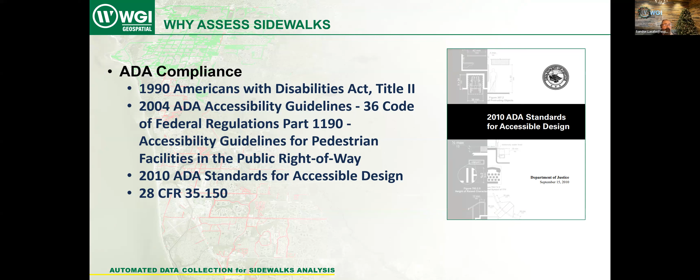So in 2014, there was a landmark case, Mark Willits versus the City of Los Angeles, resulting in a $1.4 billion class action settlement that was approved, requiring the City of Los Angeles to repair its sidewalks over the next 30 years to comply with the ADA Act. This settlement is one of the largest disability access settlements in U.S. history and was a response to the city's failure to maintain sidewalks in a condition that was accessible to individuals with disabilities. That basically equates to about $46 million per year spent in curb ramp or sidewalk improvements.

In 2019, a significant lawsuit was filed against the city of Philadelphia regarding the accessibility of its sidewalks, specifically the repair and installation of curb ramps. This lawsuit was brought forward by a group of disabled residents and advocacy groups highlighting the city's failure to comply with the Americans with Disabilities Act, requiring streets to be accessible. As a result of this lawsuit, the city agreed to a 15-year plan to install and fix at least 10,000 sidewalk curb ramps. This plan included specific milestones requiring the installation and repair of 2,000 ramps every 3 years.

The City of Philadelphia Streets Department estimated the cost of installing each ADA curb ramp was initially around $15,000, and they assumed that there would be some cost reductions as the replacement became more efficient. The estimated cost per ramp is expected to decrease to about $12,000 and then fall to $7,500. But even at that $7,500 mark, that's still $75 million liability the city has to carry over 15 years.

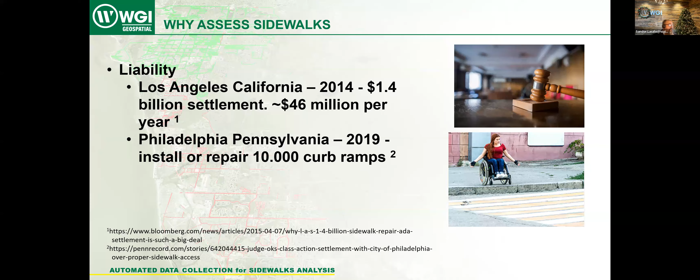Another reason to assess sidewalks is maintenance. Typically, government entities will initiate curb ramp maintenance when a citizen calls to complain about an issue. This is a reactive approach and doesn't allow the government entity to properly budget for repairs beyond looking at previous year's budget trends. With limited funding, more focus could be applied on maximizing the impact of each dollar spent to get ahead of complaints or conditions that open them up to liability.

Though complaints requiring immediate attention will always occur, strategic planning is crucial. Good planning that involves the identification of risks to prioritize repairs with a focused budget and reduced exposure to liability is worth the investment in sidewalk assessment.

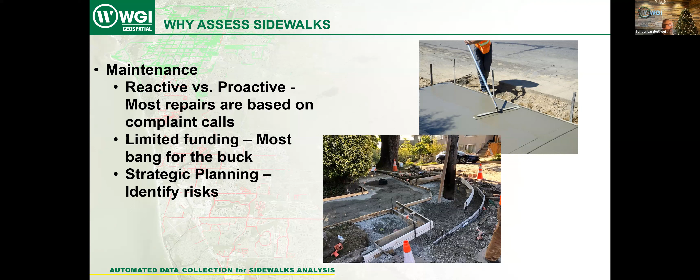This approach to sidewalk maintenance necessitates a balance between immediate response and long-term planning, ensuring safe, accessible walkways within budget constraints. What we did here: this method was developed and implemented for a Florida county where we performed a countywide sidewalk pavement and sidewalk assessment. We captured 650 miles of sidewalks using our system, then performed a condition index of the sidewalks. In addition, we captured LiDAR data to help determine some of the other ADA compliance issues. We captured imagery, and we believe the data we collected is very important for other purposes beyond the original overall condition index.

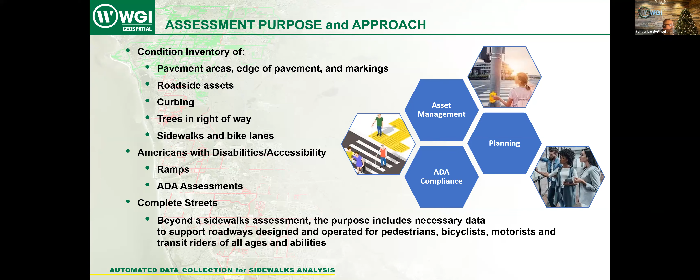We think it's going to be important for complete streets programs as well. When we envisioned this assessment approach, we saw value beyond the original purpose. Some of the opportunities to repurpose the data were very considerable. One thing we looked at was FDOT's Target Zero, a program used to reduce the amount of incidents between pedestrians and street traffic, and how the data we were collecting, combined with the additional LiDAR, can be used to help local governments assess the impact of intersections as they're laid out and how they can affect interactions between pedestrians and vehicles.

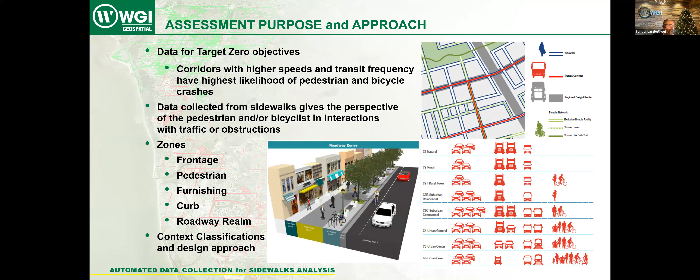So what data do we collect? Here we're just going to give a couple of examples of the types of data we're looking for in a sidewalk assessment. Some of this is related to ADA compliance, and some of this is just for condition assessment of the materials the sidewalks are created from.

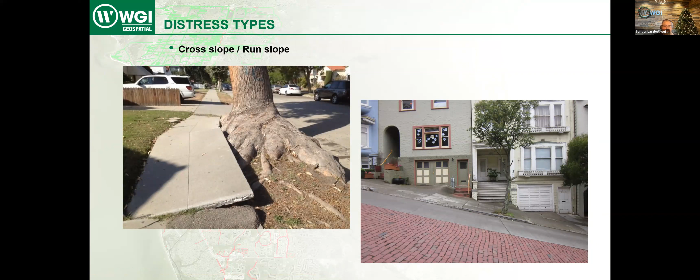Obstructions - this is obviously a very important one. If somebody with a wheelchair or mobility aid can't actually traverse around obstructions, it's an issue, which is an ADA compliance violation. So we also look for the clear walking path, to ensure that if there are any obstructions in the sidewalk, pedestrians have at least a 4 foot or greater walking width to go around them.

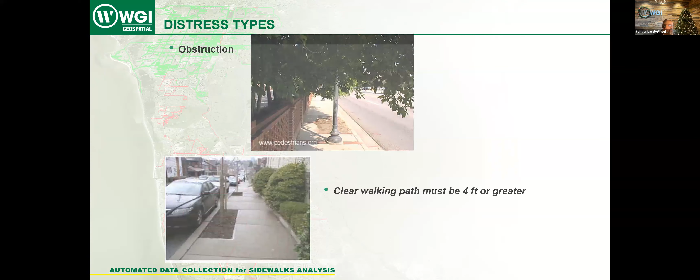Next one is overgrowth and vegetation. Similar to an obstruction, these typically require maintenance where crews would have to come out and potentially remove the vegetation. But again, if it's something that prevents the passage of somebody with a disability along that sidewalk, it requires attention.

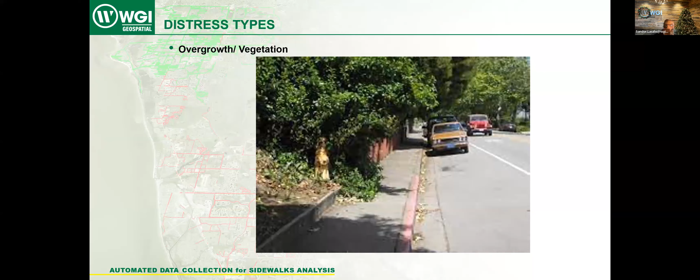Drop off - this is another important one. If you have any significant drop offs, again with a mobility device, it could cause a tripping or falling hazard. So this is another type of distress that we look for.

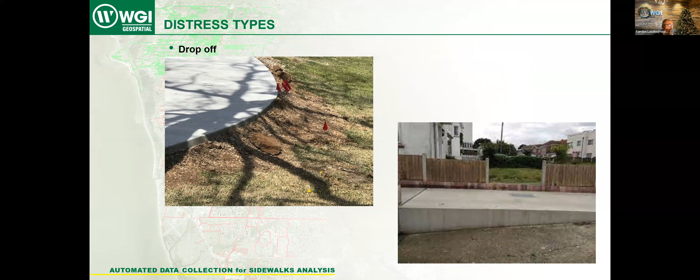Next one is spalling. Again, if you have any irregularities in the surface of the concrete or the pedestrian path, it can cause a tripping hazard and is a condition that needs to be addressed.

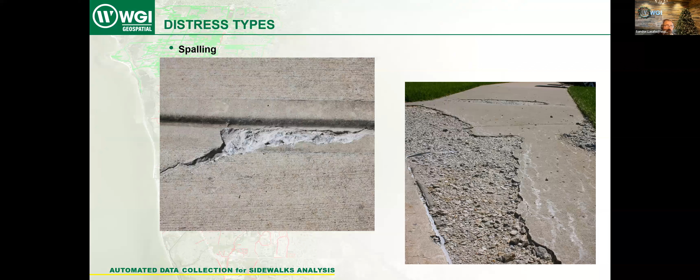Another one is ponding. Typically this is related to issues with the sloping. If the ramp or sidewalk was not constructed properly, or if there's been any kind of deflection or movement of the panels, you get sediment collection. But it's an indication that during rain events, the sidewalk can become impassable. So that's another type of distress that we look for.

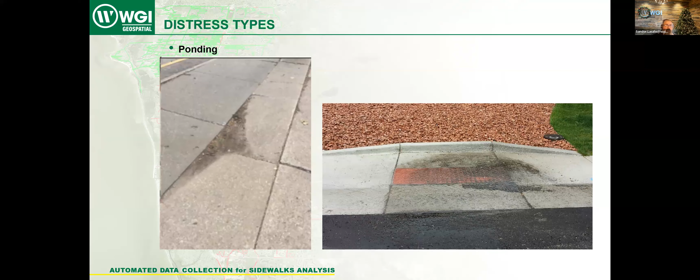And then the last example here is longitudinal cracking - cracking straight down the center of the panel. We differentiate that from horizontal cracking because it could be indicative of a more serious condition where there's uplift in the center of the panel, possibly from tree roots, and we want to make sure we're documenting these appropriately.

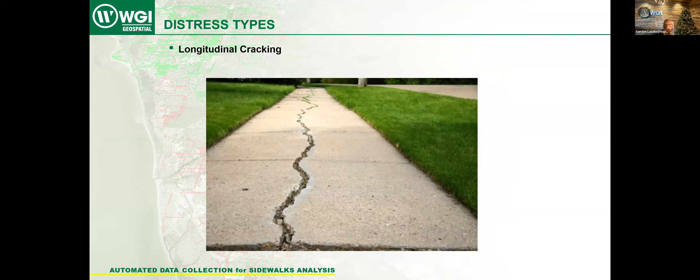So we believe this data should not be compartmentalized just for sidewalk assessment. If so, it's just great data that measures sidewalk cracks and other defects. All this data is linear referenced. All of the images, all of the defects that we collect, they all have coordinate references.

At the very least, beyond its purpose of sidewalk assessments, this is data that supercharges enterprise GIS for roadside analysis, and it also empowers local entities with a wealth of information that they could run analysis on to develop different views of where their sidewalks are and their current condition.

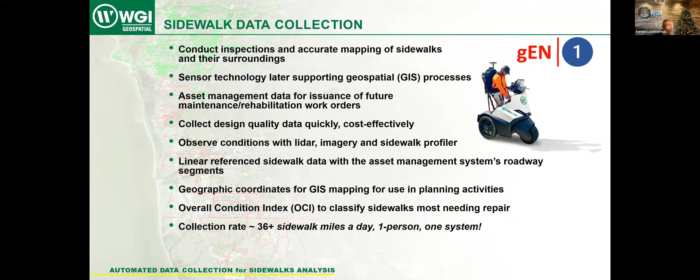People see that with other technologies, the advent of the smartphone. There's a big push recently for people to take iPhones or Android devices and develop field applications where they go out and take pictures, or use the LiDAR sensor on the iPhone to measure sidewalk defects.

But really, it's short-term information. The accuracies on these devices are not the best. While some testing has indicated that you could get within 1 inch horizontally or quarter-inch vertically, these were really only achieved because they were done with a really tight control network that had sub-millimeter geometric accuracy. Our solution does not rely upon that.

Our solution uses GNSS in combination with an IMU to really give us very tight positional information, not only for our defects, but also for any of the ancillary LiDAR or the imagery that we collect.

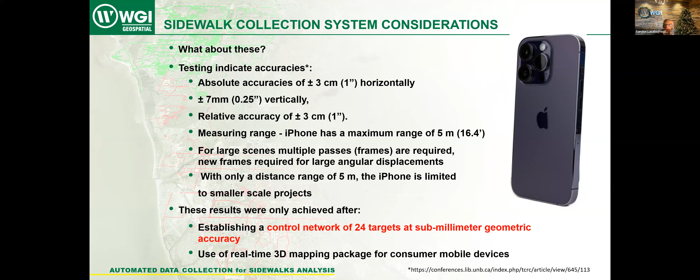We typically send out a two-man crew. One person is in a support vehicle, the other one is out on the patroller, and or on the ESV, and we have them out there collecting this information.

It's highly visible. It's not intimidating. These vehicles have really good form to fit on a 4-foot sidewalk or even smaller. Since the operators are standing up, it doesn't have the same intimidation factor of, say, a golf cart or an ATV coming down a sidewalk. So we've found this to be a very advantageous vehicle for this type of collection.

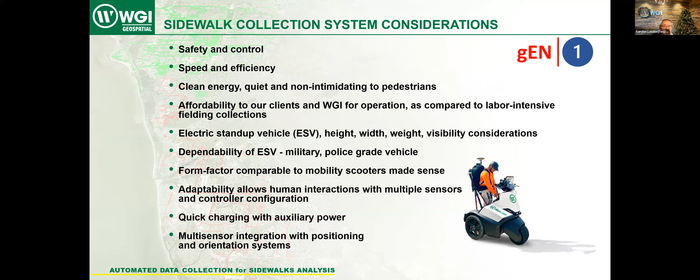So one of the primary considerations of our approach is verification of defects by multiple verifiable systems. We use the profiler, we use the LiDAR, and we use the camera. And we use multiple positioning technologies to validate all of our locations.

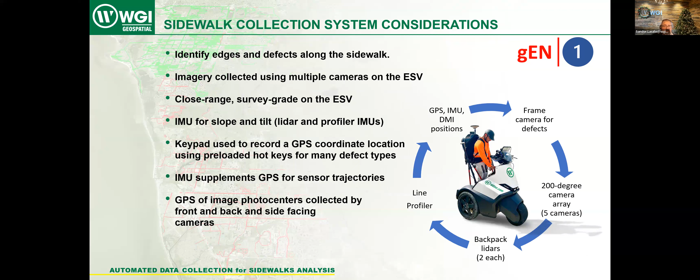All right, thanks, Sandor. So as part of the presentation, I want to walk through some of the processing steps to help give context to the soup to nuts, the beginning and end of the process.

So currently, we're looking at our backpack processing suite used to collect both spherical imagery and point cloud data. The point cloud data is processed into geo-referenced orthomosaics that are used in conjunction with the imagery. During this phase, the QA technician steps through the imagery along a trajectory and segment path to validate captured data while looking for distresses that may have been missed during field collection.

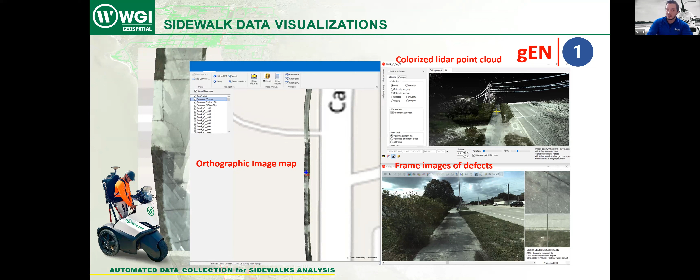Additionally, we use the spherical imagery collected from the backpack. The attribution of the sidewalk segments includes the photo centers for all images. Using the imagery, the sidewalk defects can be reviewed for defect type. By embedding the associated imagery reference, the imagery surrounding the defects can easily be assessed by the person reviewing the defect data.

As an example, looking at the blue arrow as the direction of travel, we can verify that the longitudinal crack between points 745 and 746 from the front-facing camera, and then use the backpack spherical image point named 2245 from the rear-facing camera to verify that defect.

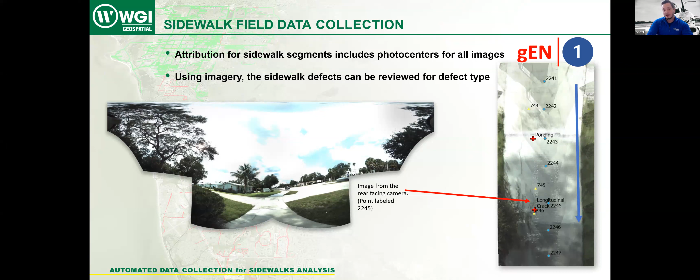Looking at our sidewalk SSI profiler, we're going to look at an example of some data collected from this. So as discussed earlier, the profiler uses GPS and an IMU and a distance measurement unit to determine its position. A point laser measures the crack width and depth as the profiler moves across the sidewalk.

Additionally, during collection, the run and cross slope of the sidewalk is measured by the IMU. All sensors, of course, are calibrated to ensure optimum accuracy.

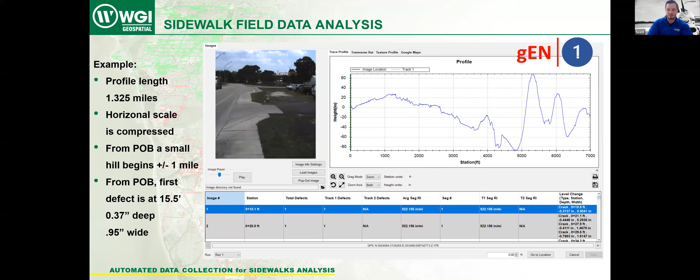So the profiler outputs various measurements as separate GIS datasets. These GIS datasets are compiled for quick aggregation of the distresses, and that facilitates the QA process in conjunction with the LiDAR-based ortho photos. The profiler, front-facing camera, and LiDAR systems all come together with the spherical imagery.

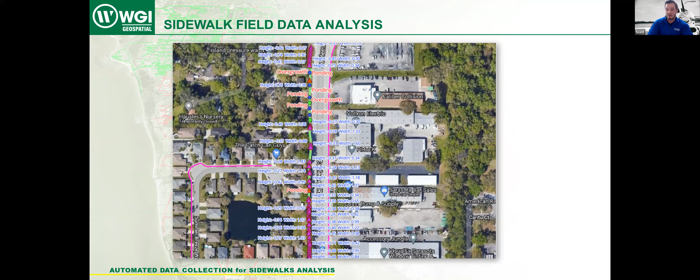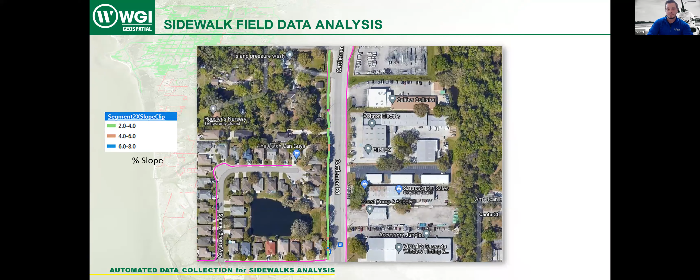Once all this field data is compiled and processed, it is then integrated into a database. But before the final geometry is generated from the robust OCI process, we export a custom table of the defects.

which allows the client to quickly review, adjust weighting, and instantly see the effects across the entire dataset before running a baseline OCI. This is helpful for clients that emphasize resolving certain defects or combinations of defects.

It's important to note that we can exclude defects within the process. We can also adjust the severity of the weights used. And it's important to note that the index values are empirical and all relate to self-normalization.

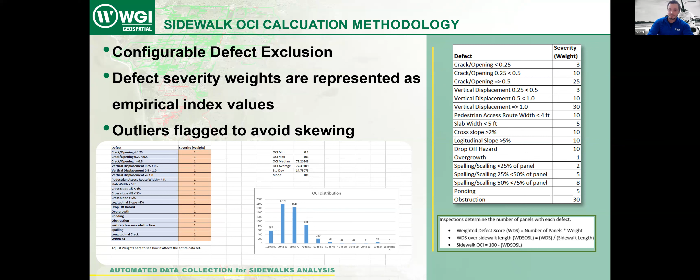So the OCI tool workflow includes a custom Esri-based toolbox for initial feature generation and integrated OCI adjustment reporting. The OCI tool aggregates the defect data by using spatial analysis to determine the proximity of the defect to sidewalk centerline. Once associated, the tool calculates the number of defects, applies the weights, and determines the final OCI score of the segment. The segment centerline is later associated with the road segment IDs used in the pavement asset management system.

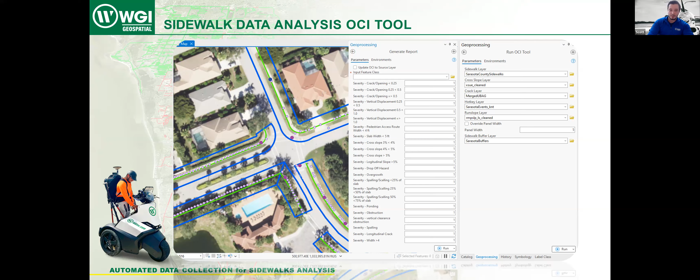Once all the processing and algorithmic generation is done, our team has developed a fully customizable user portal to significantly elevate the end user experience while providing comprehensive insights into condition index results. This portal offers an interactive and dynamic interface, enabling users to engage with customized OCI calculations overlaid onto other GIS datasets, including census data, parcel information, zoning, and land use data. Our friendly interface features easily configurable widgets, providing users with multiple viewing options and adaptable settings based on their preferences.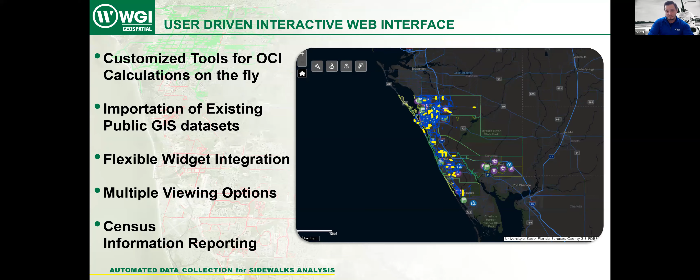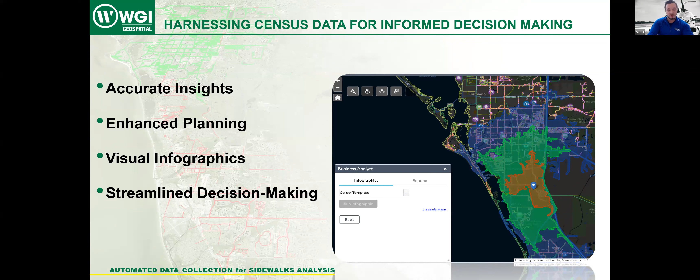Harnessing the census data for informed decision-making, this is a very powerful tool integrated into this portal. The open source census data pairs with user-friendly tools and empowers efficient extraction of geographical insights. In this particular instance, we're looking at both customized driving distance as well as walking distance.

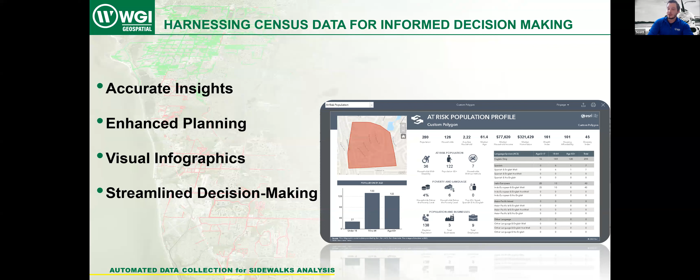Users can pinpoint areas of interest through manual selection or pre-existing parcel boundary files, enabling rapid extraction of critical information vital to planning and budgetary decisions. It empowers users to derive insight critical for effective planning and resource allocation, ultimately fostering better community development.

User-defined quality control analysis: the enhanced usability and interactivity of this portal allows users to experience an interactive platform, making exploration and data analysis more engaging and user-friendly.

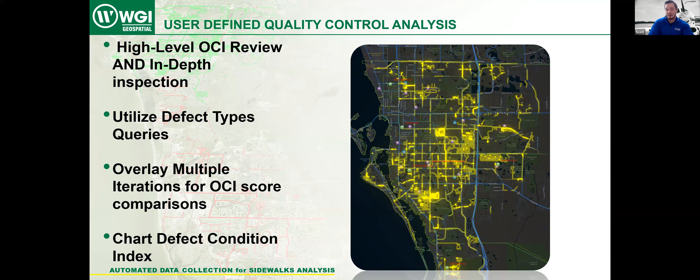Customized insights: by integrating the iterative OCI datasets and comparing them with other GIS datasets, the user can gain a contextualized understanding of the OCI results and defect types within specific areas, aiding in decision-making.

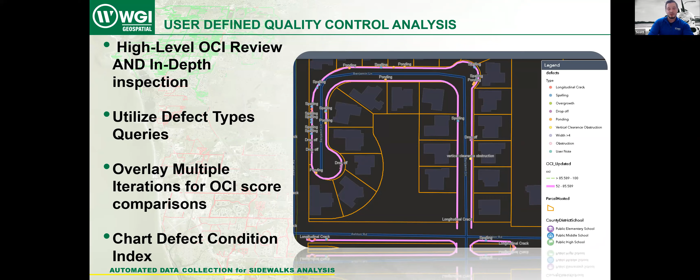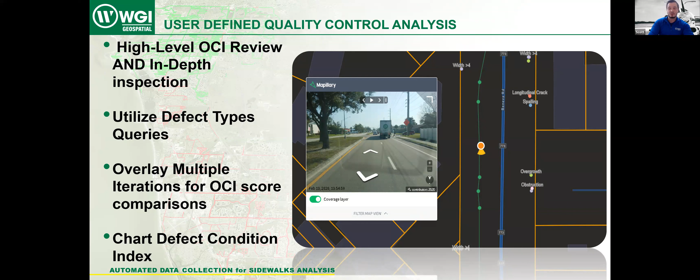As well as this interactive environment, we offer on-demand reporting. The user is given the capability to generate ad hoc, user-defined reports, aided by current census data, providing users with up-to-date, tailored insights critical for the decision-making process.

Associated point cloud and imagery viewing options: along with the OCI tool and OCI defects, as Sandor mentioned before, we capture many other datasets, spherical imagery, and LiDAR. We also add street-level viewing options to help inspection.

Street-level inspections serve as a valuable method for on-ground assessments, offering real-life visualization of infrastructure conditions to help determine the severity of defects and overall condition at the time of collection, or it can be used as a simple reference. We have a couple of options.

We can provide available open source imagery. This open source imagery is a great cost-effective offering, enabling a broader perspective and multifaceted historical examinations.

We also can curate street imagery collected during our project. This directly correlates with the overarching dataset and identifies defects clearly based on the field collection. It simplifies data categorization and streamlines the quality control process for defects.

And finally, we also can host a three-dimensional point cloud. This point cloud data facilitates enhanced visualization and analytical capabilities, specifically enriching the overall utility of the data and elevating the user experience.

Looking forward, I will pass the torch to Sandor to pick it back up.

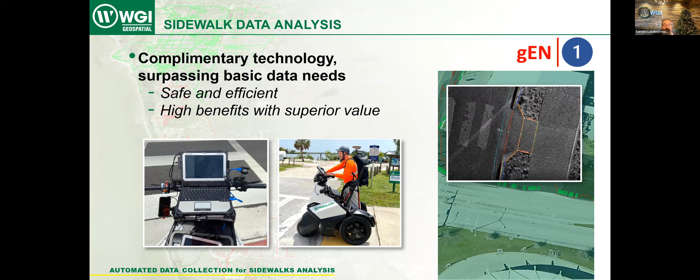So with the Gen 2 system, what we're looking to do is move the profiler from a single scan line to a wide scan angle. We're looking to add a higher accuracy LiDAR system with dual head sensors, so we get a better, denser point cloud as we do this collection. And we're also looking to add a panoramic 360-degree camera as well. So essentially, we take the components of what was in Gen 1, and we are just upgrading the technology to get richer datasets out of these sensors.

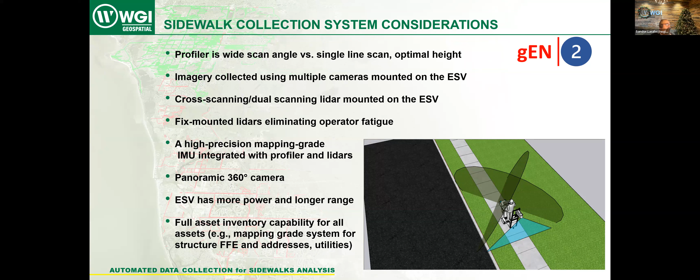An example of that is shown here. This is a pavement scanner that WGI has, where we've applied it to sidewalk crack detection. Essentially, this is a single head sensor that captures a 14-foot swath of the ground behind the vehicle.

In the processing suite for that sensor, we've worked with the manufacturer to adjust their automatic detection algorithms to work with sidewalks. So not only can we use this for roadway assessment, but we can use it for sidewalk assessments as well. The nice thing is this data is easily ported into the OCI calculation we keep mentioning, so whether we're doing a Gen 1 or Gen 2 collection, we can quickly update the input data to calculate that same condition index. This improves our repeatability, especially year over year, having this level of detail in our data.

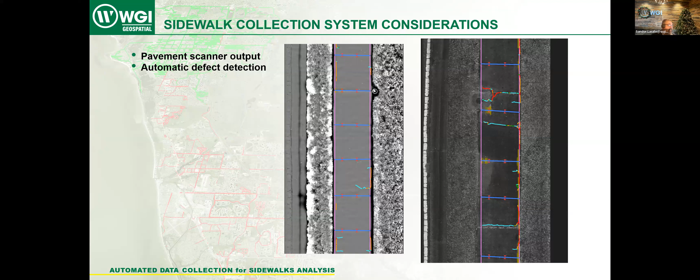Another advantage of having the mapping grade LiDAR data is it allows us to capture very detailed LiDAR from a unique position. Typically, LiDAR sensors of this type only have one viewpoint to capture from, which is the road. By moving it to the sidewalk, not only does it help with our extraction of sidewalk assets, but we're using that data for other purposes as well.

Whether it's to supplement a right-of-way asset inventory, we get a very unique view from being on the sidewalk with this system. Between the high-density LiDAR and the pavement scanner, we get very, very accurate data, especially with the pavement scanner, down to 1 millimeter of depth on the sidewalk itself. So it's perfect for doing this type of crack detection.

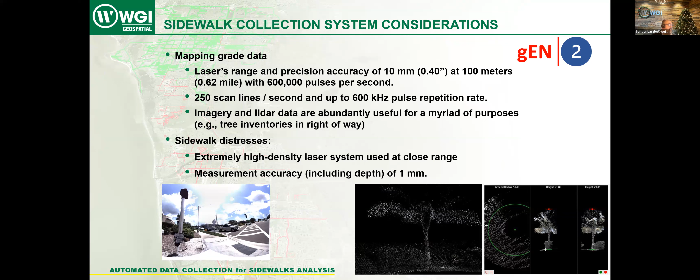Another advantage of this is between the LiDAR and the pavement scanner, it's perfect for doing ADA ramp extraction. So if we have to do any kind of ADA assessment to determine if ramps are compliant or not, this is the perfect data set to do that.

Some of the other things we have is our WGIGEO.tech platform that allows us to take not only that pavement data, but also our point cloud and imagery, and put it into an HTML5 viewer that allows you to access it from any device.

But we also have device plugins that allow you to pull this information in and extract or view information in the ArcGIS or QGIS platform.

So the data is all provided, all this information is extracted, and we can provide any extracted data into any type of GIS file format, be it shapefile, file geodatabase. If it has to go into Postgres, we could do that as well. It's really a rich type of data that we can extract out of this and provide.

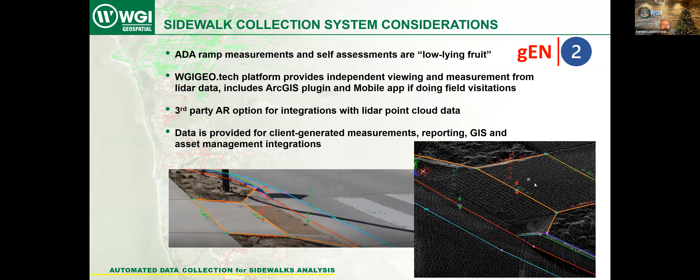So this is really, WGI, we are a full service geospatial firm, from surveying mapping to GIS, asset management. We offer a lot of services, and we're proud and excited to be able to offer additional new service lines using the latest technology like the sidewalk assessment and analysis.

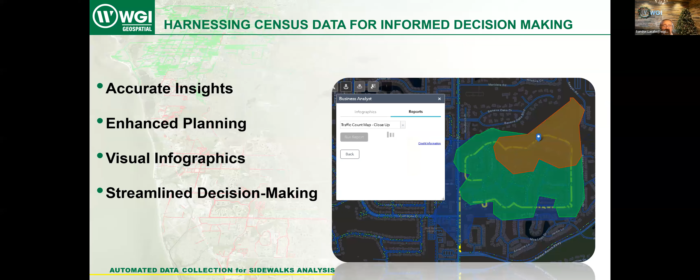No, we really appreciate the opportunity to let us present. If you do think of any questions after the fact here, Scott's going back to where our contact information. Please don't hesitate to reach out to us. We're more than happy to talk about the approach, the technology, and the data. If somebody wants to see what that data looks like on a little bit more of a guided tour, we'll be glad to do that.